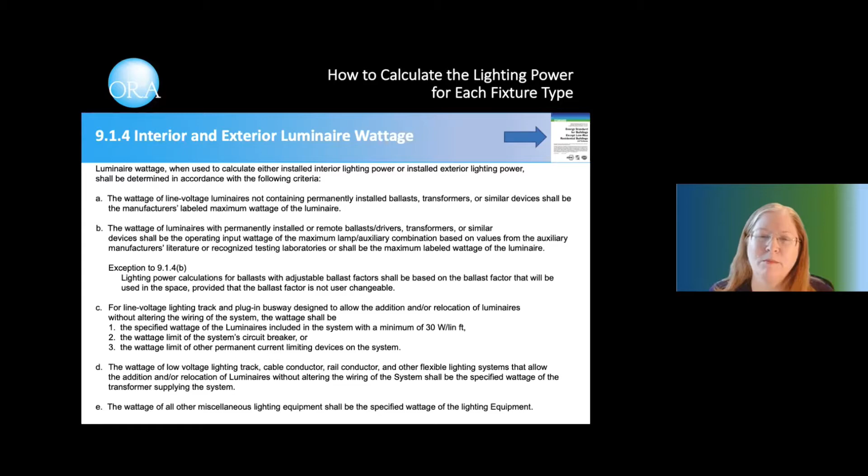Now, why are we going to discuss both codes? For the first time in a long time, the way the watts are counted is not the same. Total connected lighting power is determined by adding up all the watts used on the project. Each type of light fixture has a defined method for counting the watts. This is the code language in ASHRAE. The pages of this presentation are color-coded, blue for ASHRAE and green for IECC, with a code book icon on the page to remind you which code is being discussed.

IECC has written these code requirements as a formula. Dense code language like this makes everyone's eyes glaze over. Let's break it down by the categories and compare ASHRAE to the IECC requirements.

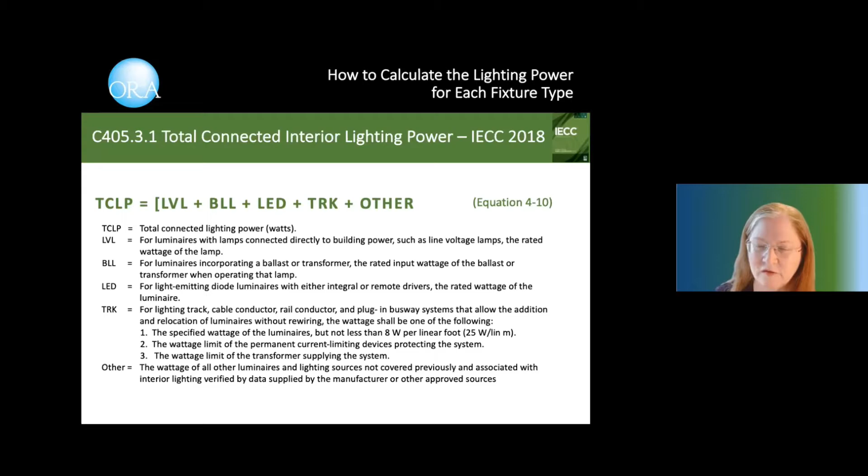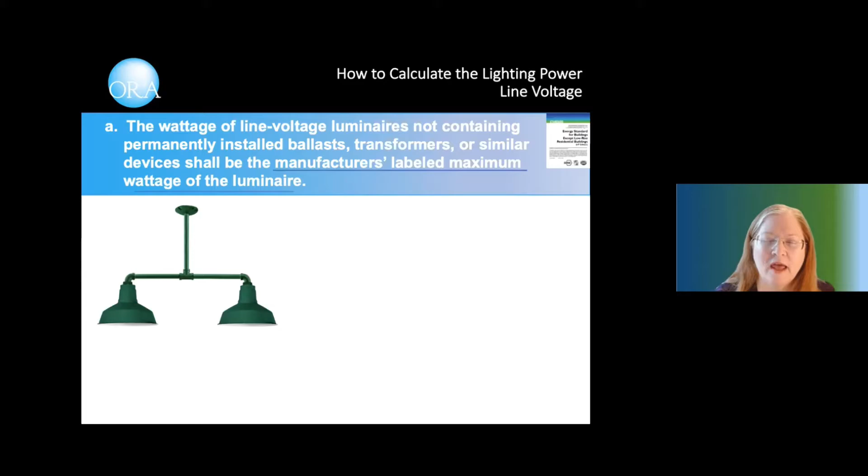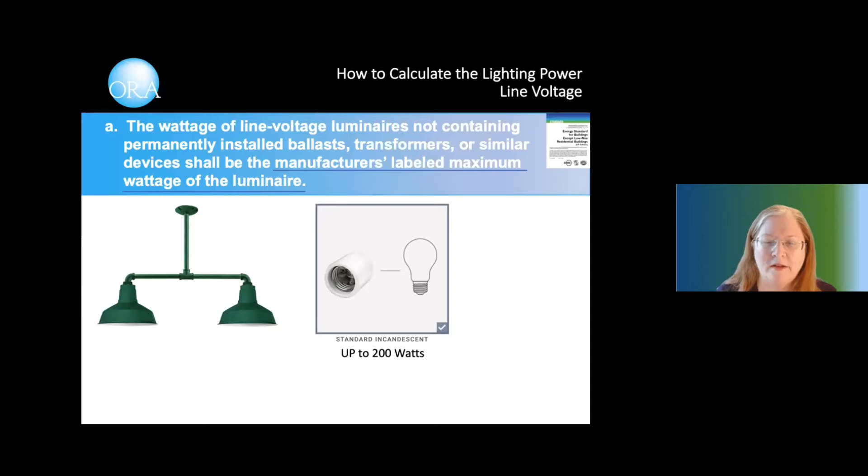In ASHRAE, a line voltage fixture without a ballast, no transformer, no driver, like this one with 2 medium base sockets, is counted as the manufacturer's maximum labeled wattage. This manufacturer says each socket is safe to use with up to 200 watts. The luminaire would count as 400 watts.

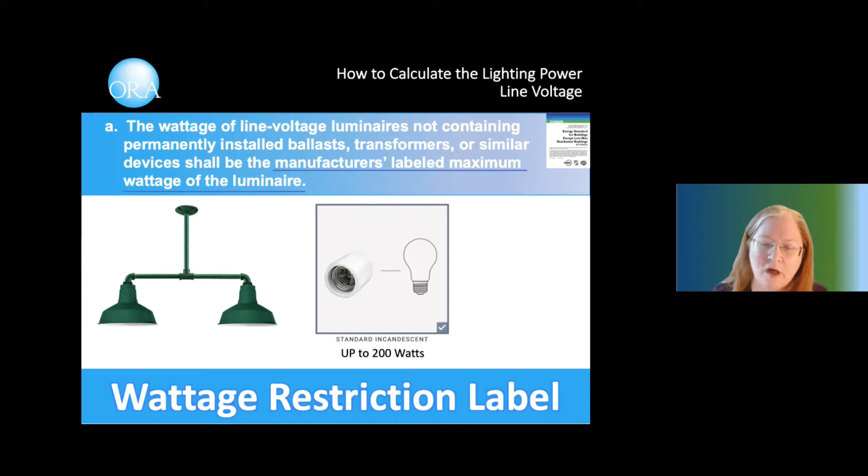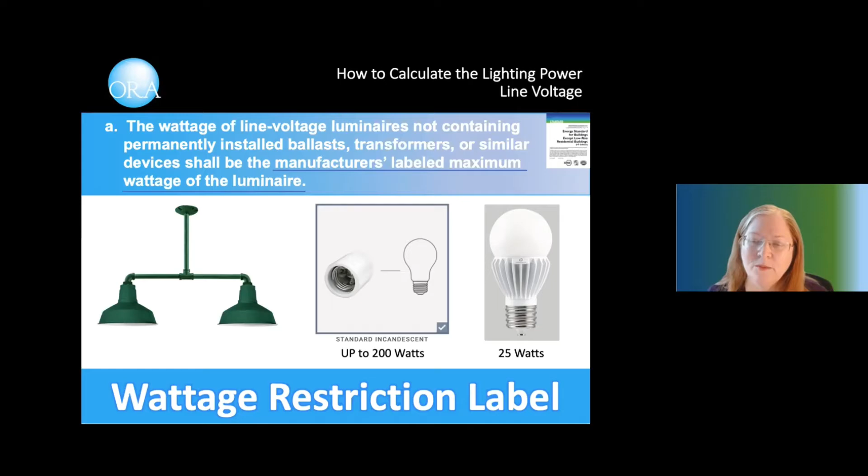The specifier can ask the manufacturer to provide a wattage restriction label on the socket so that the maximum wattage counted is lower. This LED lamp is roughly equivalent to a 200-watt incandescent and uses only 25 watts. With a wattage restriction label on each socket, the luminaire now counts as 50 watts, not 400 watts.

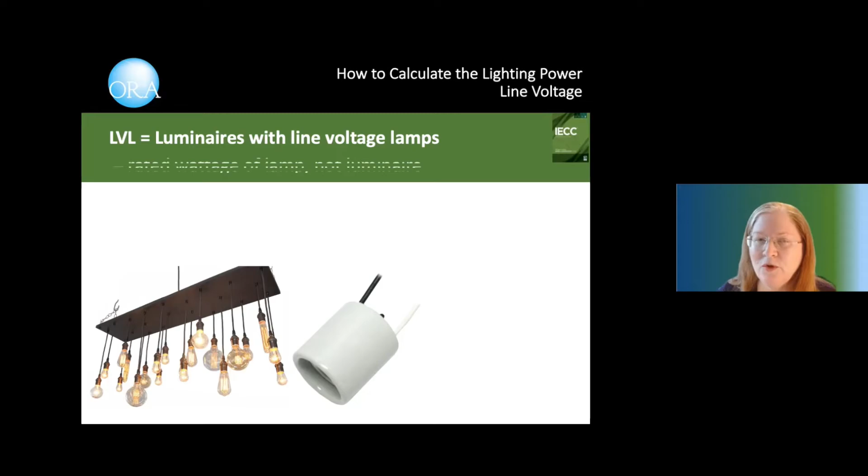In IECC, the equivalent portion of the formula is the requirement for LVL, luminaires with line voltage lamps. New in IECC, we count the rated wattage of the lamp, not the luminaire, which, as we've already seen, can be a huge difference.

In this example, each socket is rated at 150 watts. With 20 sockets, the fixture would count as 3,000 watts. With 20 LED lamps, each at 10 watts, this chandelier would count as 200 watts with or without a wattage restriction label. In IECC, we count the watts of the lamps.

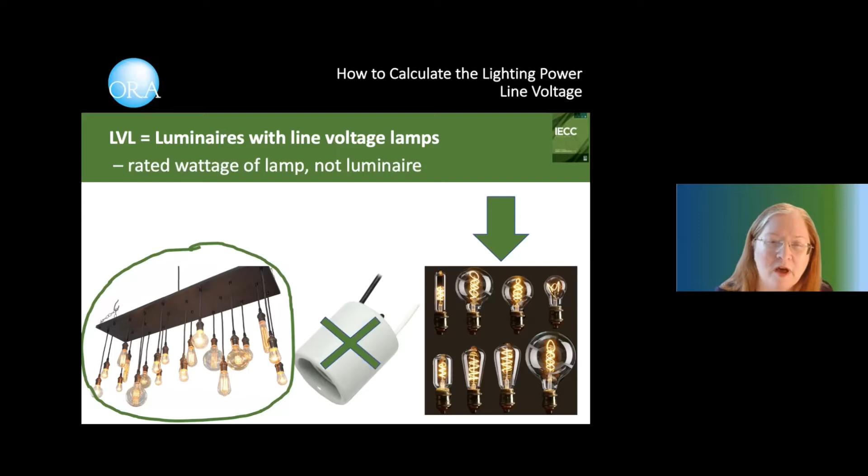When the fixture has a dedicated ballast, driver, or transformer, ASHRAE says count the wattage of that device, or the maximum wattage labeled by the manufacturer. In ASHRAE, this covers both LED and legacy sources.

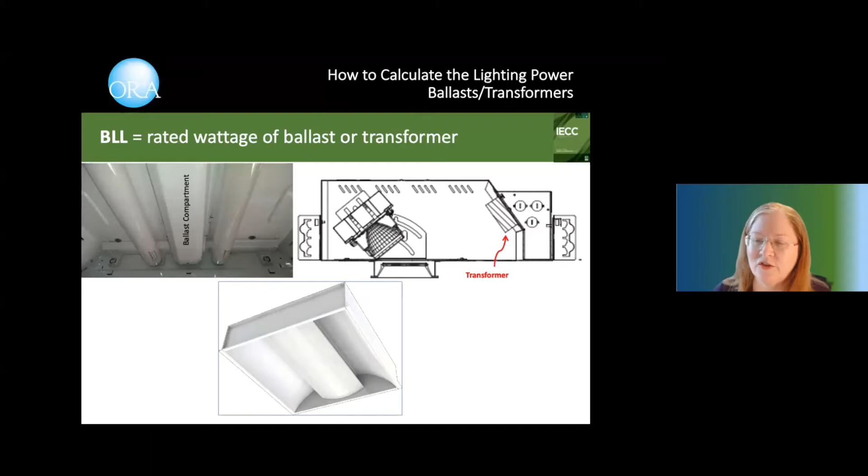In IECC, BLL is the portion of the equation where we count the rated wattage of the dedicated ballast or transformer for legacy sources. For dedicated LED fixtures with either integral or remote drivers, IECC says count the rated wattage of the luminaire.

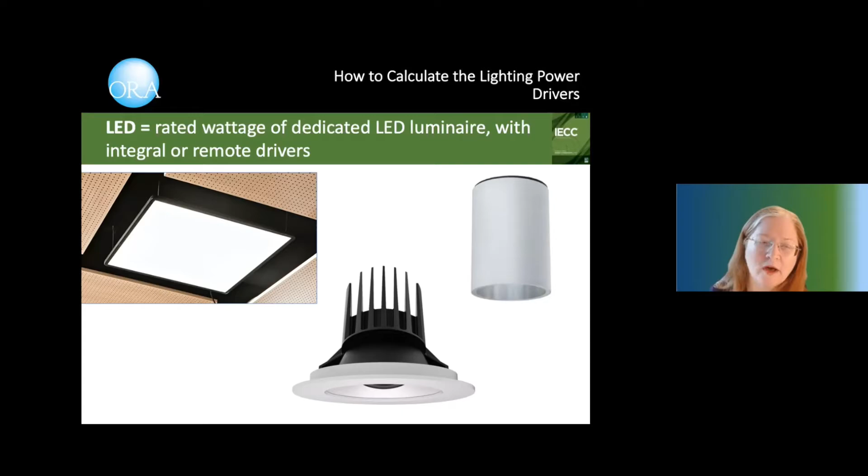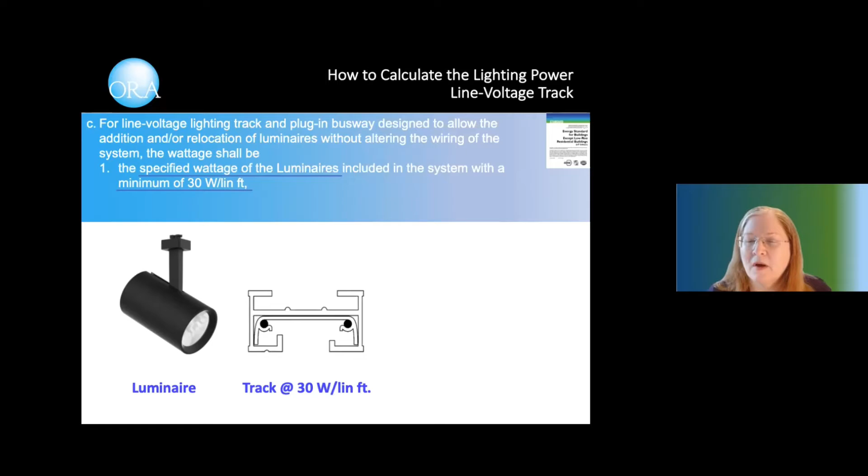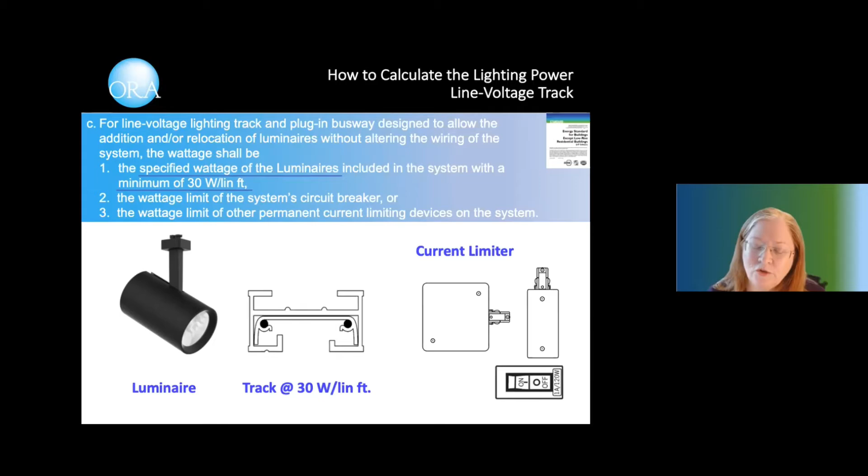When counting the watts for track, ASHRAE separates line voltage from low voltage. For line voltage track, count the wattage of the luminaires used, or 30 watts per linear foot of track minimum, whichever is greater. Alternatively, count the watts of a circuit breaker or a current limiter. A current limiter scares some people, but it's really a simple accessory included in a track installation that restricts the wattage that can be installed on the track, protecting the system from overload, usually by turning it off.

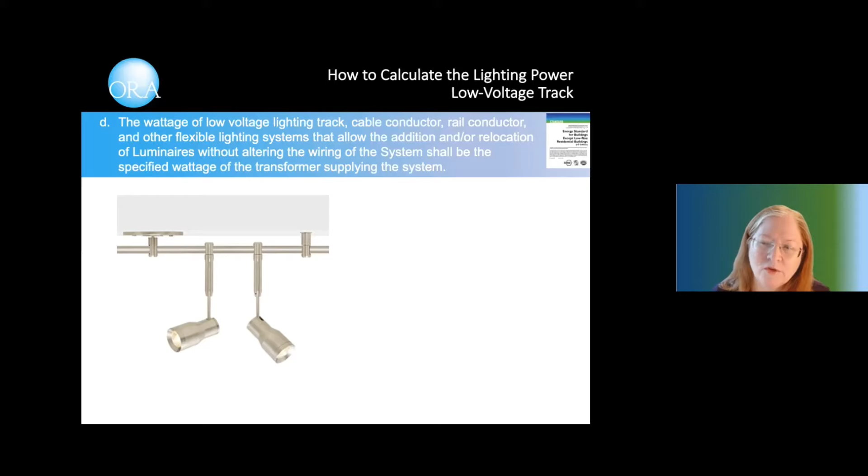ASHRAE specifies how to count the watts on a low voltage system separately from line voltage. Always count the wattage of the transformer supplying the system.

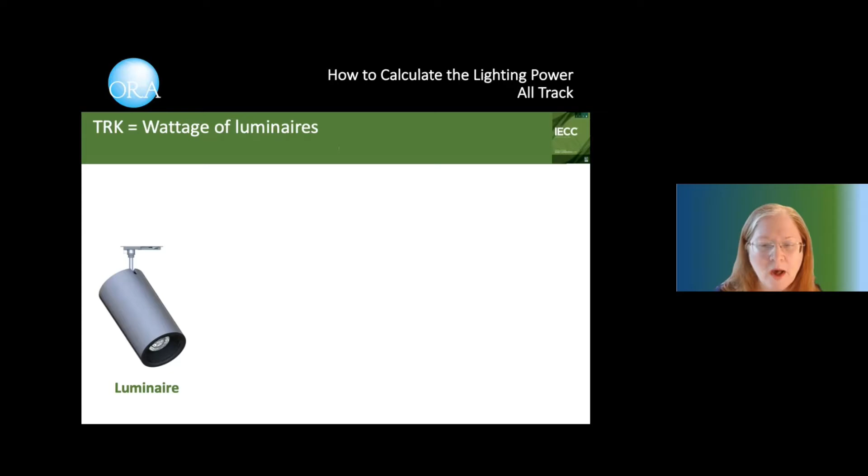Track is another area where the IECC method of counting the watts has diverged from ASHRAE in the current code cycle. For track, similar to ASHRAE, you can count the wattage of the luminaires specified for the track, but not less than 8 watts per linear foot of track. Remember, ASHRAE counts 30 watts per linear foot.

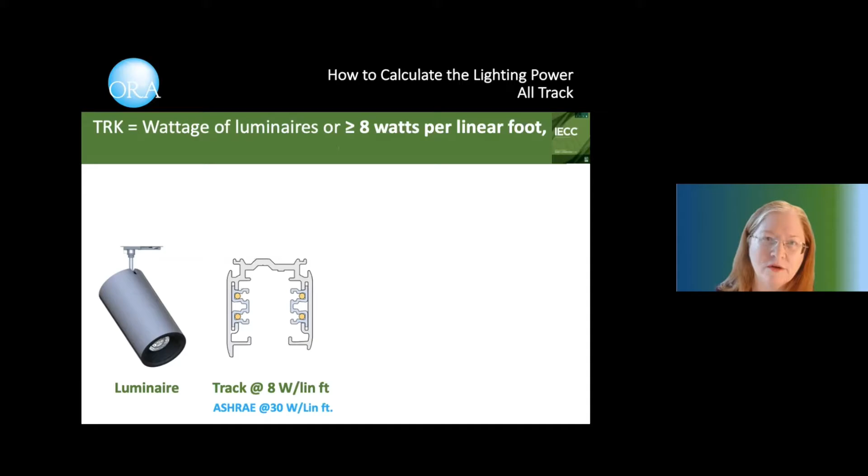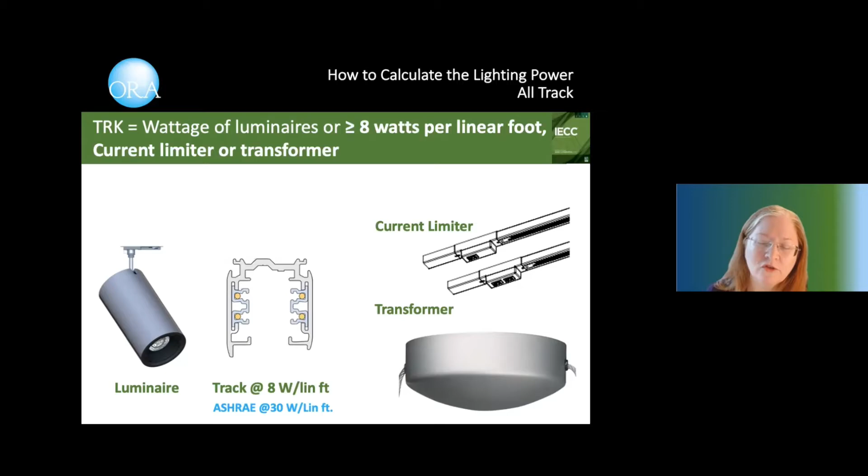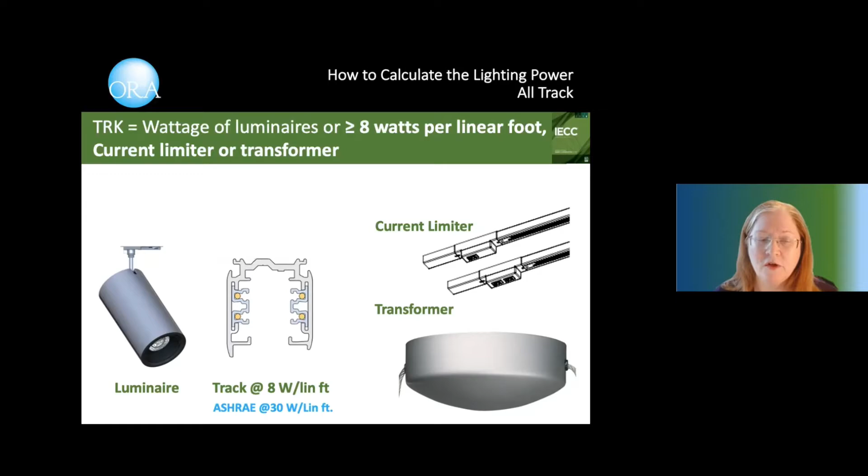A current limiting device restricting how many watts the track can accommodate might still be desirable for long runs of track, but is less likely to be necessary to meet the IECC code path. For low voltage track systems, you can count the wattage of the transformer serving the system, but best practice would mean that the watts of the luminaires would always be less than the capacity of the transformer. And in IECC, you can still count the watts of the luminaires as your path.

If the project has other luminaires not already described, both codes have an other category where we are directed to use the manufacturer's specified wattage.

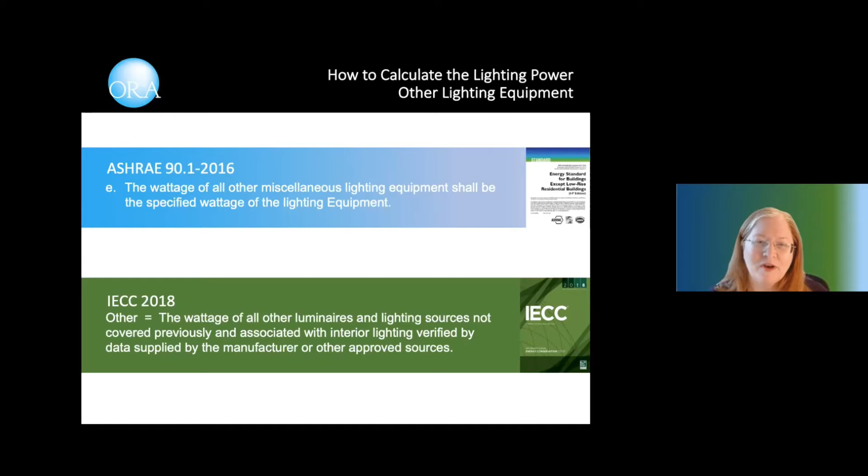In summary, when counting the watts, there are two good reasons to select the IECC compliance path. First, for line voltage fixtures, we count the watts of the specified lamp so that we might not need a wattage restriction label. And second, the track is counted as 8 watts per foot, which might preclude the use of a current limiter.

However, there are two types of projects that must use the ASHRAE compliance path. Projects seeking LEED certification use ASHRAE. And in New York City, if a project is large enough to build a whole building energy model, you must use the ASHRAE compliance path. I hope you now have a better understanding of how to count the watts.

James, back to you. Well, definitely a better understanding, and I think it seems to be a moving target with the energy codes, of course, and having coordination within the team about which codes you're designing to is key to the success of it as well.

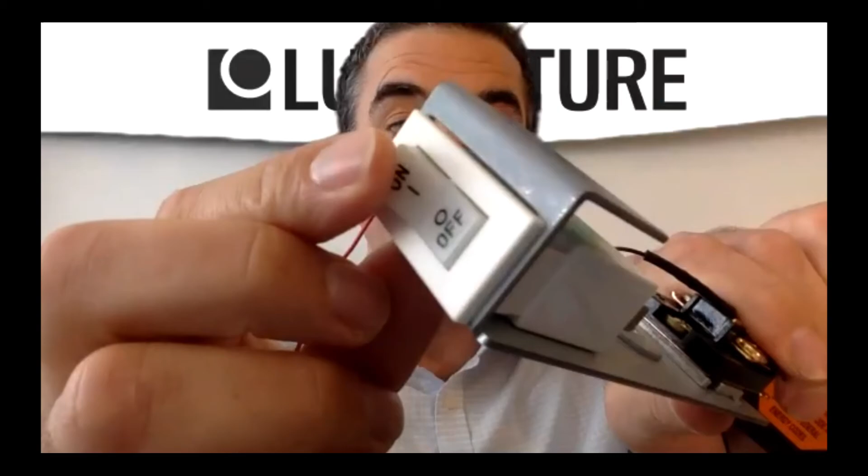And then what we're doing is feeding it instead of a normal feed, you would actually attach that. This right here is the actual breaker itself. The current limiter and the actual breaker is what's going to be rated for how much actual power is going through there.

That rating is usually designated by the electrical engineer, correct? Correct, exactly. That's a very important part of this, to say okay, what's the actual ownership of who indicates and basically specifies what that is.

So what we're assuring by putting a breaker on there, and the range can be from only a half an amp all the way up to 12 amps, is that it's getting very close to what's actually being used on the track. For example, at 25 track fixtures at 18 watts apiece, and a 450 to 600 watt current limiter could be used. With that, it's getting much closer. Regarding IECC, it's a per-fixture label, so it would get even more accurate, being that if it's an 18 watt fixture, the actual label of the fixture shows 18 watts. That's the entire allowance of what that is.

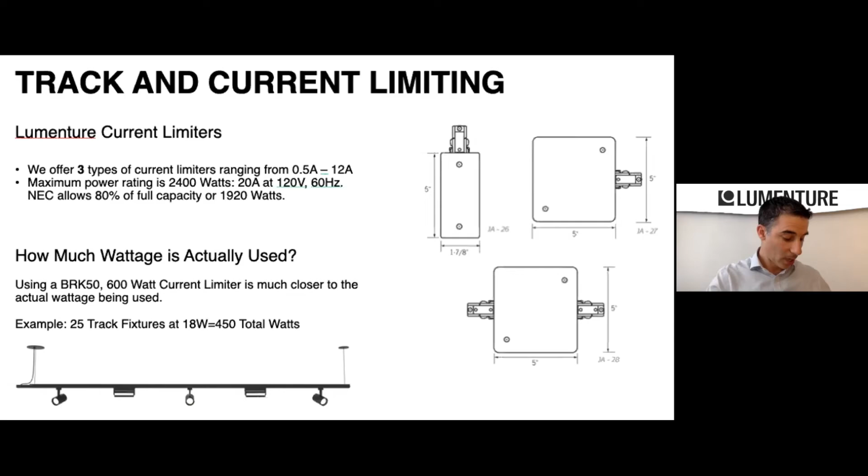So it's interesting, and in terms of the different types of current limiters, there's inline, end feeds, and then a slim end feed. With that, I'll jump over, if there's no questions, to what's a little bit interesting regarding what we're doing for wall washing.

One of the examples we have, in its most compact form, what we do is aim to have the most minimal packaging, so 100% efficient. We've all got those Amazon boxes that has a spoon in a 2-foot box with a tremendous amount of wasted space. So we try to be as efficient as possible, which allows us to inventory more and have a quicker delivery.

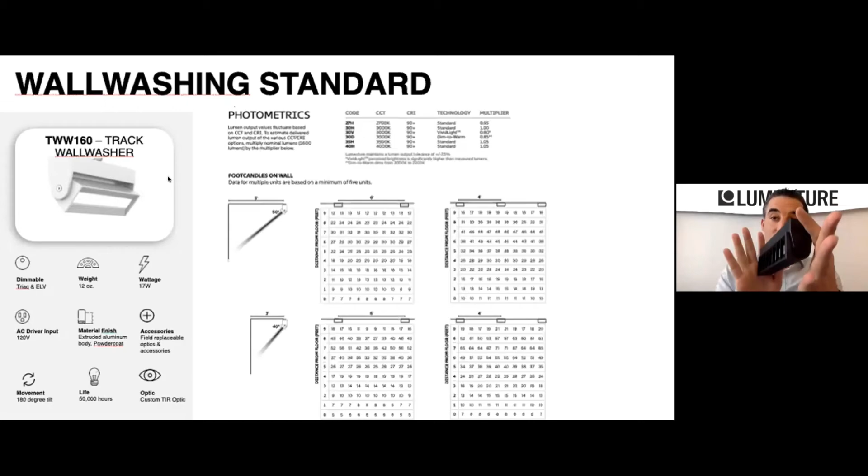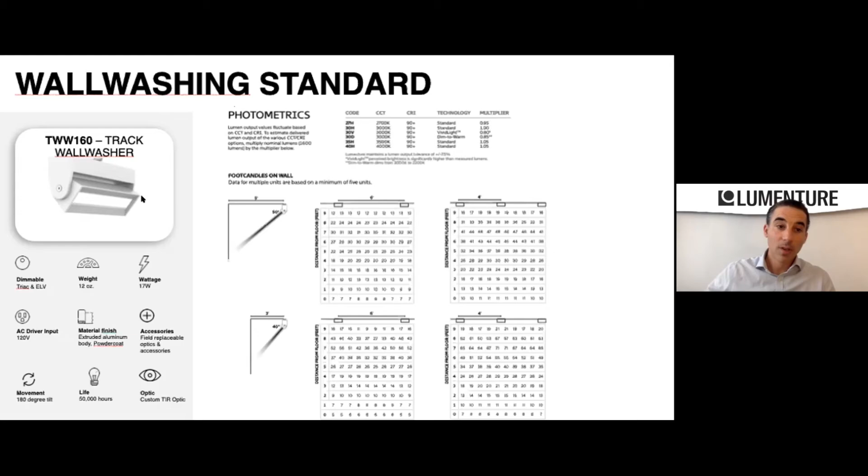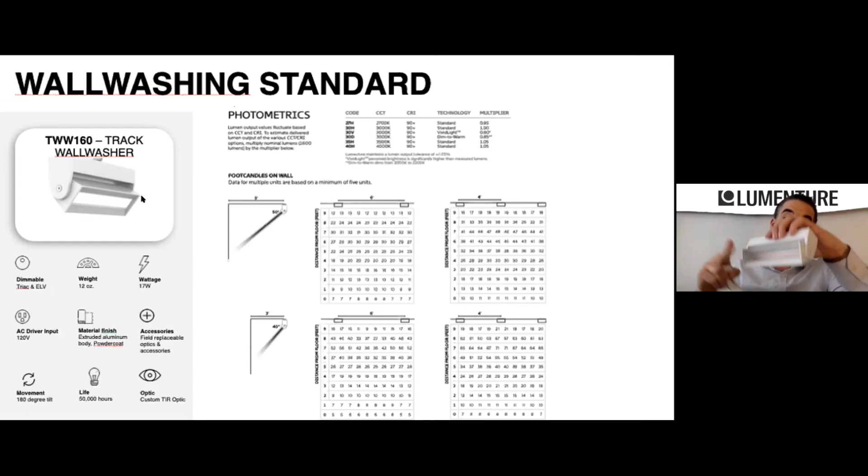There's been a tremendous amount of installs very simply regarding a standard point source fixture and a wall wash fixture. What's interesting is we're doing one layer of light with the wall washer, and then with the point source we're able to accent at a higher lumen level. So whatever these foot candles are, if we add accent point source track fixtures to that, we're now going to raise the foot candle level in a very specific area.

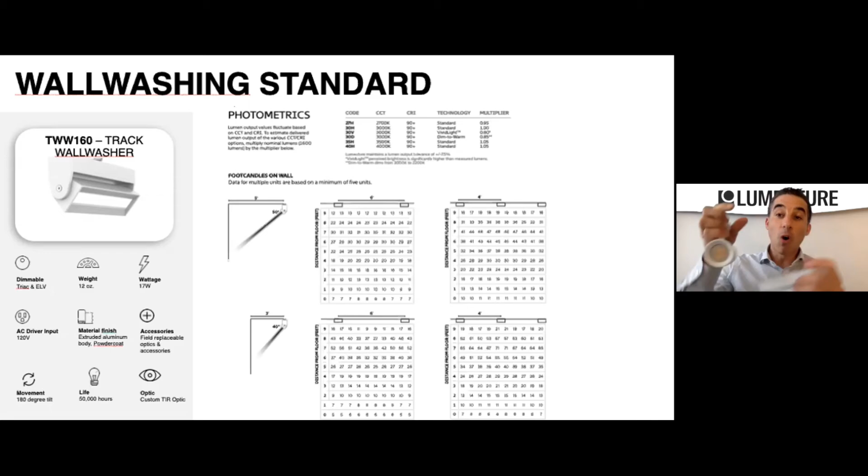Moving on, some unique design installs require actually only a cylinder-esque form factor fixture. So what they've said is, okay, we understand the wall washers, we really appreciate what that's doing, however for this install on this design aesthetic, we only want cylinder-esque fixtures. So what would then happen to the wall washing?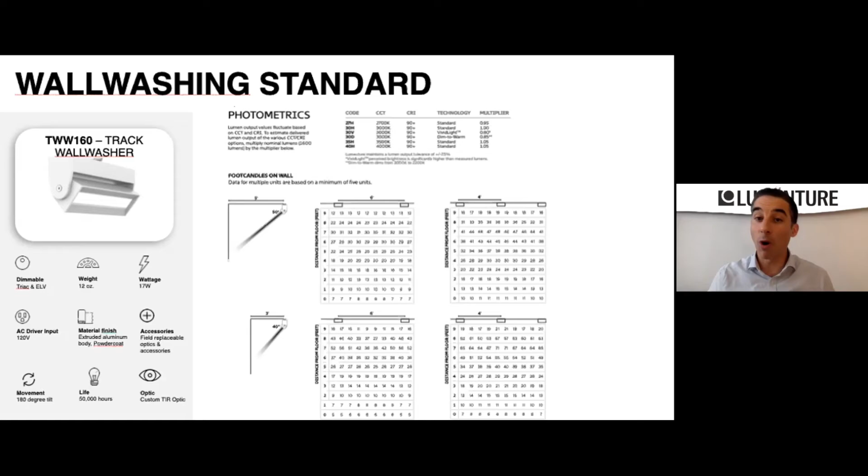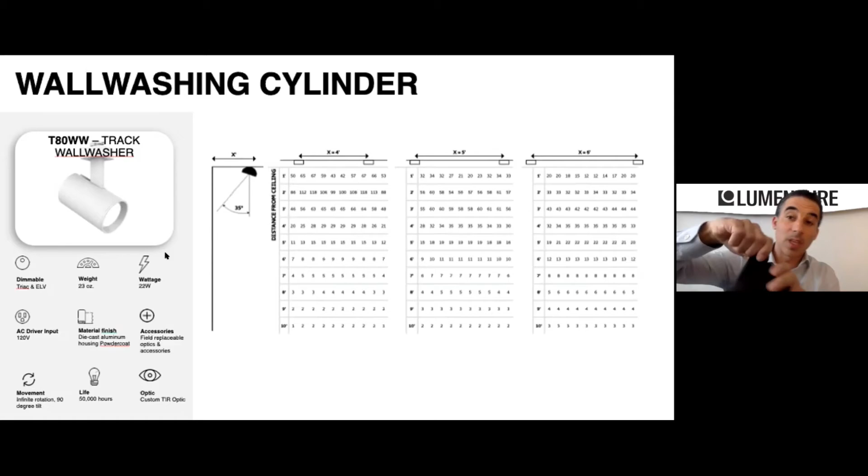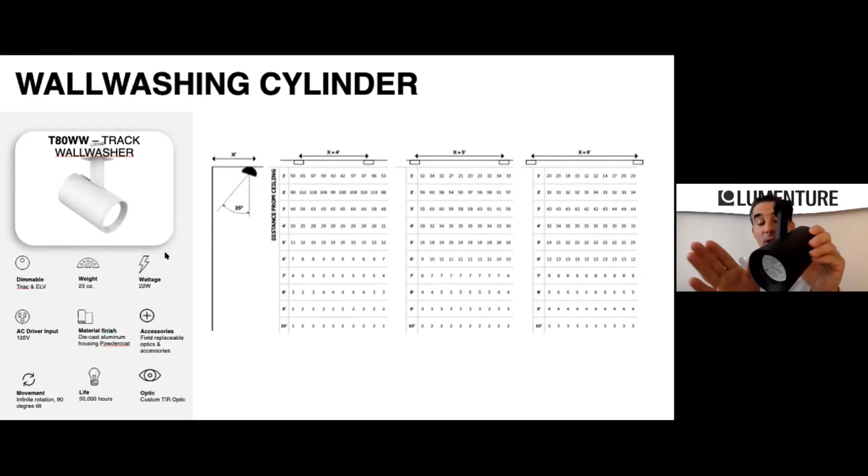What we've developed, and will be coming out with, is a TWW or T80 wall washer that is going to essentially have a point source and wall washing capability. With that, an example is from the optic itself, what we're doing is changing the distribution of what would normally be a standard point source beam, but we're now spreading it out to create an actual wall wash effect through the beam bending, changing that distribution from narrow to wide.

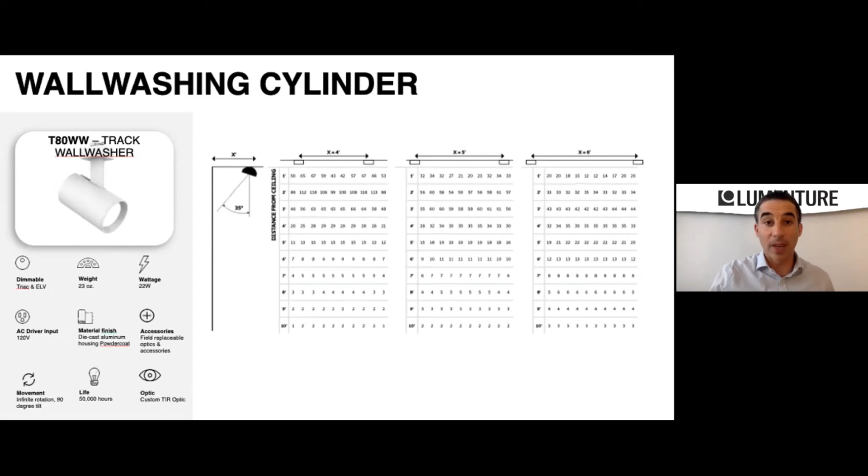It's interesting in terms of the whole spectrum of what's available for wall washing and point source. We're trying to have the most compact, minimal form factor, so no protruding edges on the fixture itself, yet the versatility of a track head with a center pivot point, with the fixture not having the exit out of the back. It'll be a completely uniform install on the track itself, regardless of aiming angle.

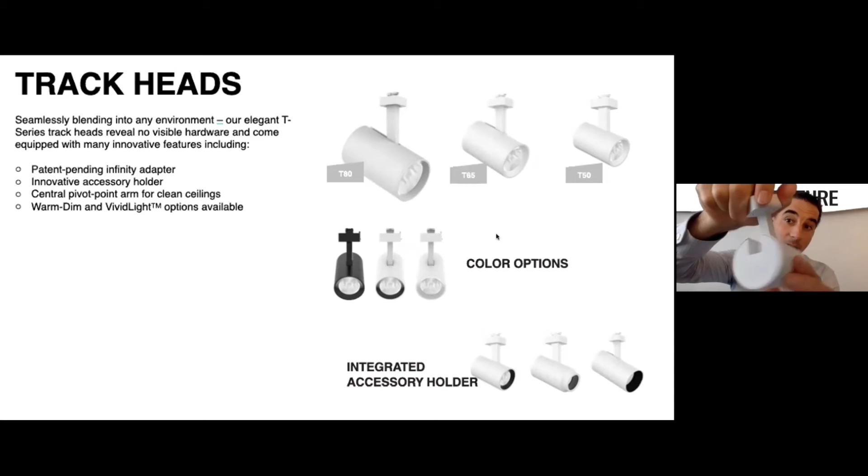It's also interesting because of the half-size track adapter, which can accommodate J-type track, H-type track, L-type track, and global track, a 2-circuit, 2-neutral system. It's a line voltage 120 volt fixture with infinite rotation and no exposed hardware. For projects that require aiming and focusing, it's obstruction free to assure the light is exactly where it needs to be.

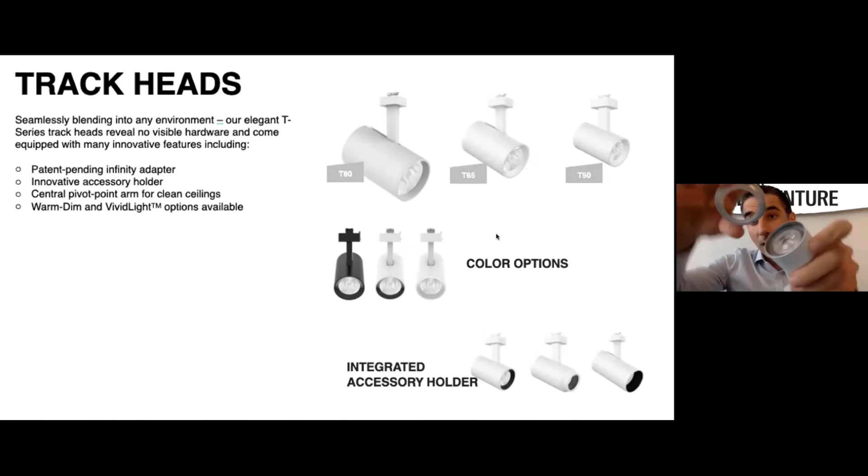We're also paying attention to shielding and very specific characteristics of lighting design by allowing for full accessories. It's a threaded front, so we're able to go for a tapered snoot or a straight snoot. A lot of questions come up about whether the inner is masked, so it would be glare free or flash free on the edge of the lip. We try to have the fixture aperture be as quiet as possible.

Also worth mentioning is that with each accessory and fixture, you have at least one accommodation of a thick accessory, and then at least two of the thin film diffusion accessories, so a linear spread or some sort of color gel is available.

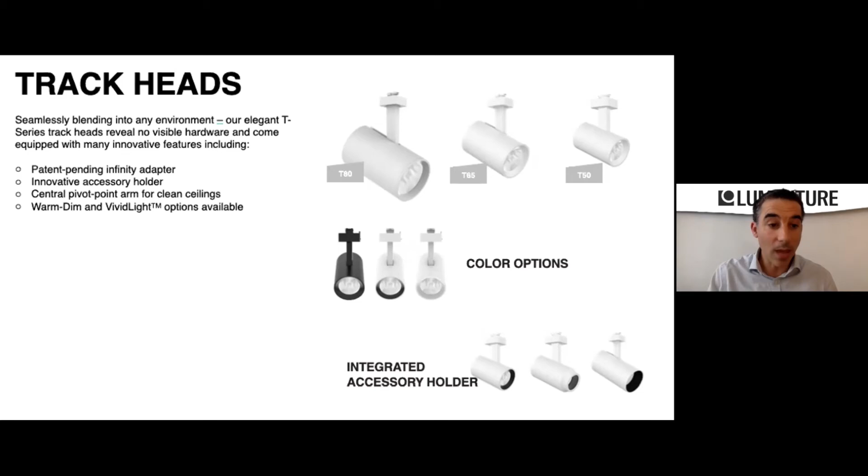We understand deadlines, so we make sure our website is a 2-click website to get you exactly what you need for the spec sheet. You'll notice on the first page of every spec sheet it's the complete catalog number. We do this by design to give you the full breadth of what characteristics are available without needing to go to subsequent pages.

All of the subsequent pages go into the details regarding the actual candela curve, the different color temperature, multiplier levels to see how much light is actually getting out of the fixture, and the last page has all the different accessories, the tapered snoot, and so on.

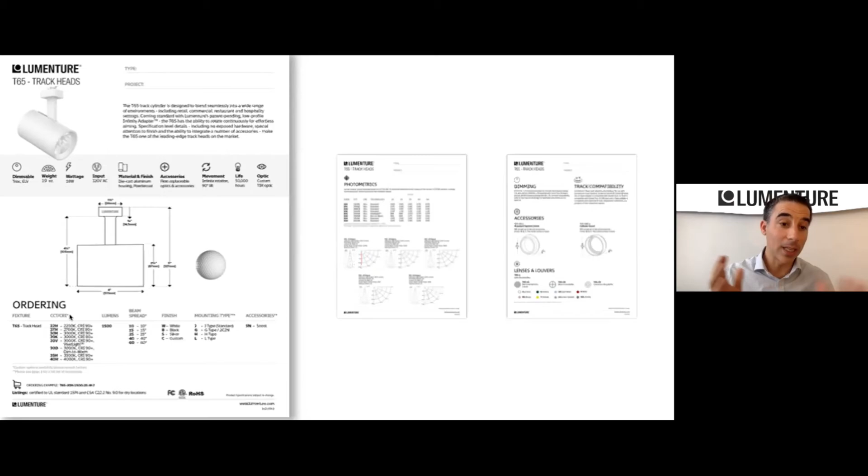So the T65, you'll see, has a beam angle range all the way from 10 to 60, and everything here is also available in dim to warm. We're not limited by available color technology, so you'll see listed on some spec sheets an actual plus 95 CRI chip. We want to pay particular attention to that.

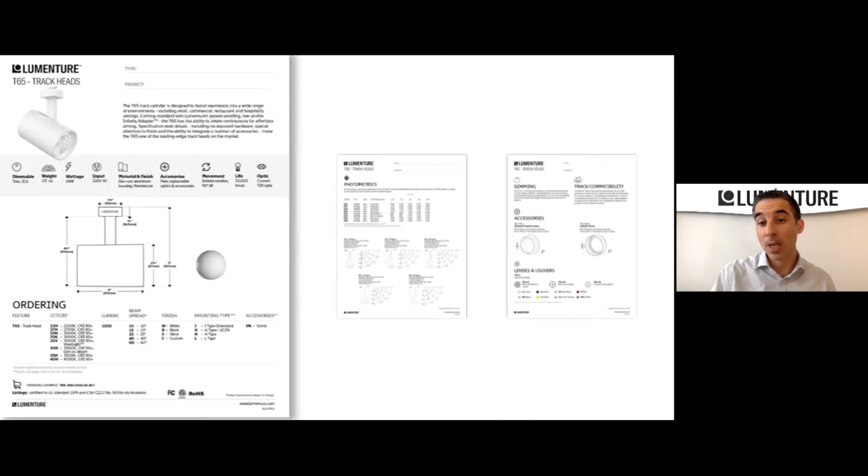With the fixtures, we're also a full breadth of the range into downlights. With the downlight range, we originally had our DL100 series—an example of where we came from. It has a little bit of a thicker flange and a little bit of a wider flange, but you'll see a very nice shield hood there, to assure there's not going to be any refractivity going into the plenum itself, and a nice clean shaved heatsink.

There was a question that popped in, so we can address it. On the dynamic white side, it's 1800 to 3000. In terms of our warm dimming technology, it goes up to 3000. We're trying to go for that, and depending on the scope of the project, we can also look at other LEDs that are out there. If there's a range you don't see, we can go for it.

We purposely, by design, put a static 1800 color on our 2200K on our spec sheets as well. As a standard, our CRI is plus 90. We make sure everything is in inventory—everything you've seen here is fully inventoried in Connecticut. We don't have a formal quick ship program, but we understand the need for small quantities on quick turn projects, and we've been able to accommodate that as much as possible, which is interesting.

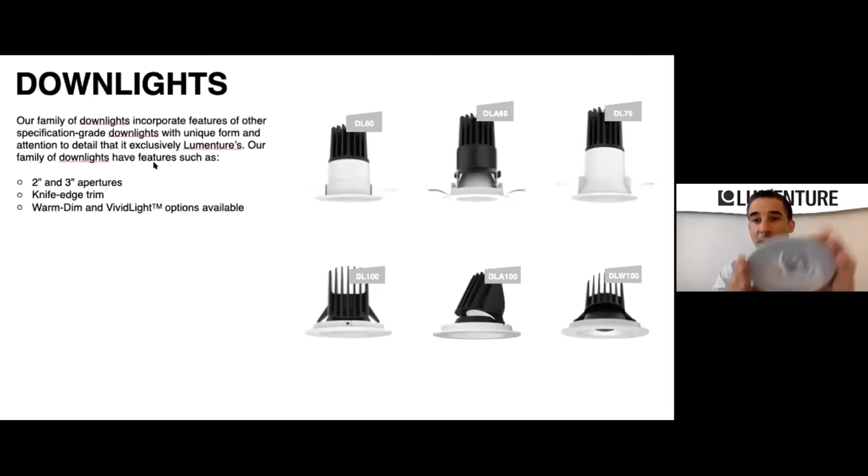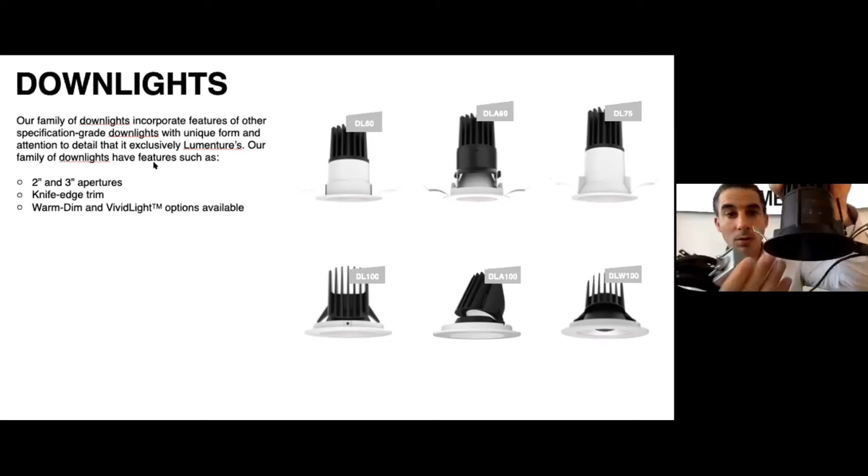To further the actual range on downlights, we've gone from what would have been a wider aperture to now a DL75 series, where we've taken the actual aperture and shrunk it down, with a smaller flange and a nice deep regressed cone. And then we've gone further to a more narrow and smaller aperture series, which is our DL60.

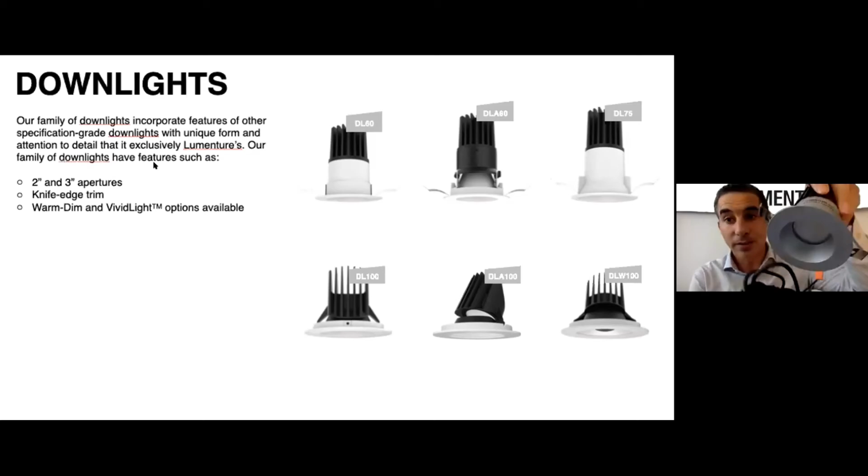And here's an example of the DL60. You'll see a nice deep regressed cone, a very thin flange, much smaller in terms of its impact on the ceiling, but full shielding available with a nice deep regressed cone, so glare free.

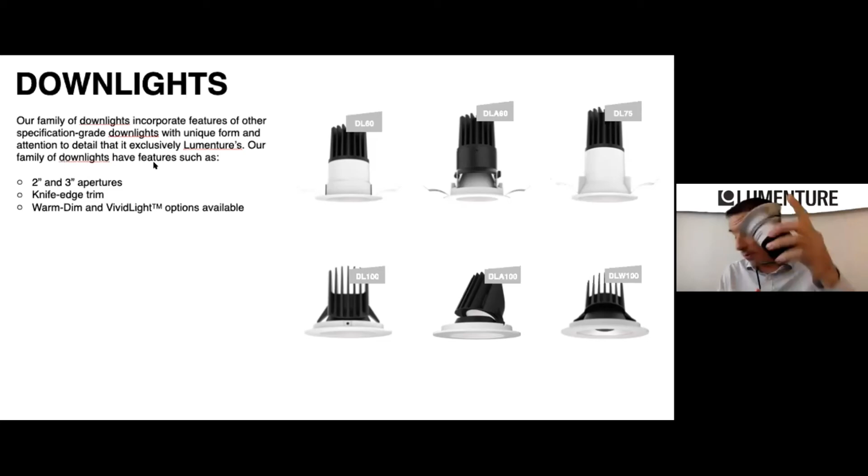And then it's a full range of a family. So we have the static or the standard fixed, and then we also have the adjustable. With that, you'll also see on the adjustable the glare shield as well, to assure no flashing regarding inside of the fixture itself or in the actual housing itself.

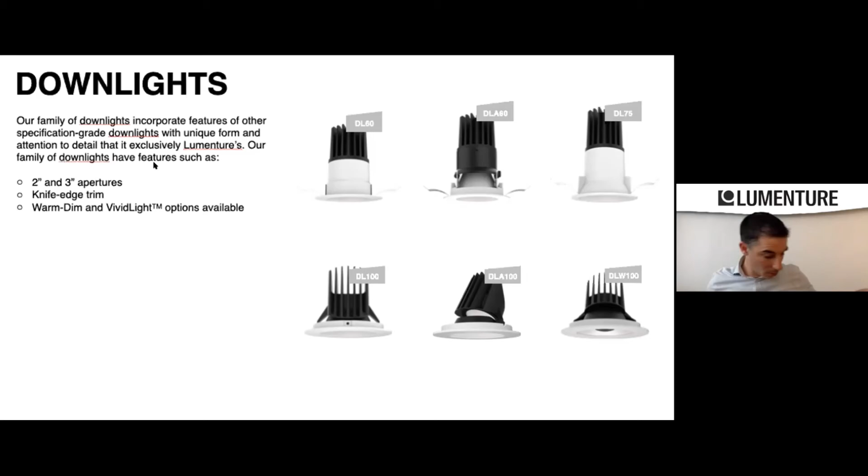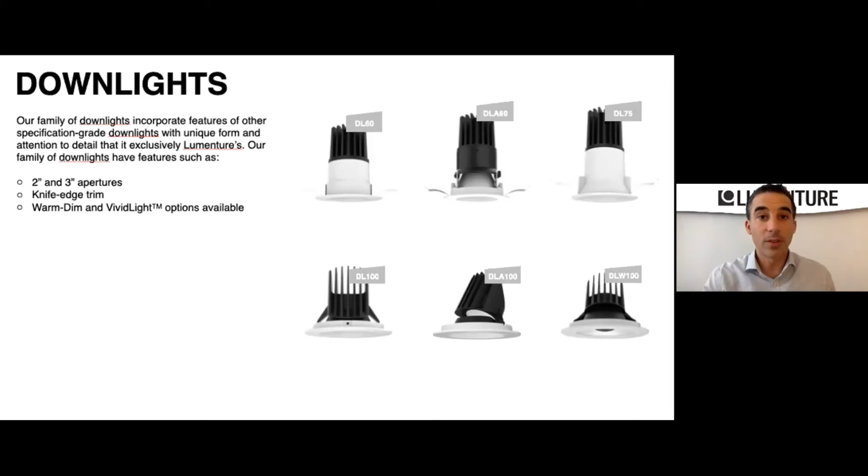And then to that point, we also have squares. You'll see the squares, and then also, most interestingly, the flangeless. So we have a very rigid and secure spine flangeless. It's not a piece of plastic that would have potential waves in it. So it's something that's going to sit very sturdy on the surface of the drywall to make sure that the rigidity over time is going to be maintained.

And with that, on our spec sheets, it calls out all of the same characteristics that you would expect, specifically regarding the overall depth—it's the most minimal as possible in the ceiling. Dimming protocols, we are standard ELV and TRIAC. On our website, you'll be able to navigate to the downloads page and see a full dimming compatibility matrix chart, which actually calls out Leviton and Lutron dimmers and catalog numbers, both pre-programmed from the factory and then adjusting a low-end trim in the field.

So what we're trying to do is really pay attention to some of the easily overlooked details, to assure an engineer that dimming compatibility would be within expectations of the spec.

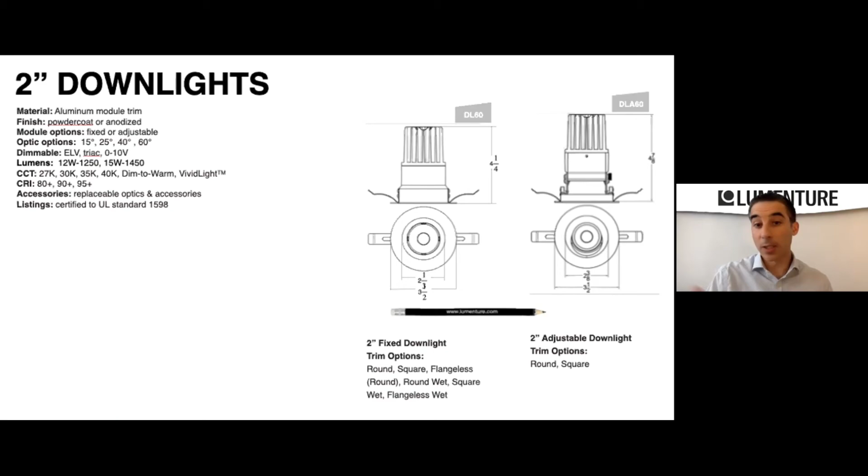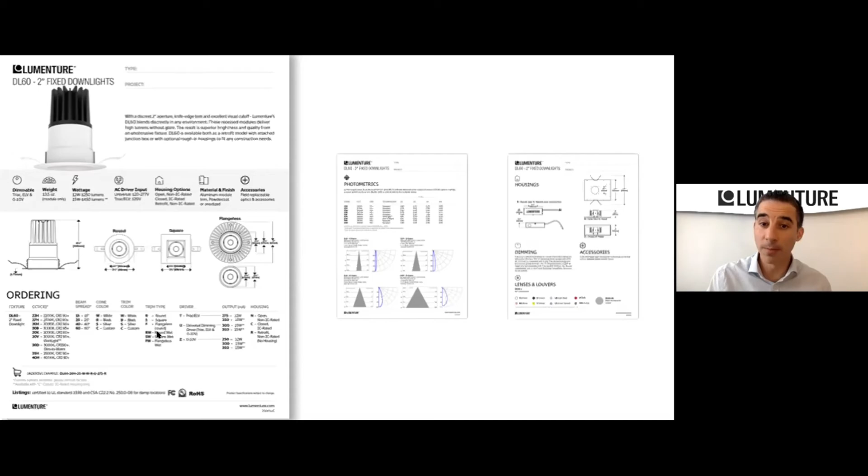So with that, every spec sheet of our new DL60 and DL75 and current DL100 fixture series, on the first page, has all the nomenclature. And as I mentioned before, it's an entire series. So you'll see both flanged, flangeless, square, round, adjustable, and then also wet location, which is interesting. And then of course, on the last page, you'll see the overall dimensions of how it actually can fit into what is typically a very minimal real estate plenum depth.

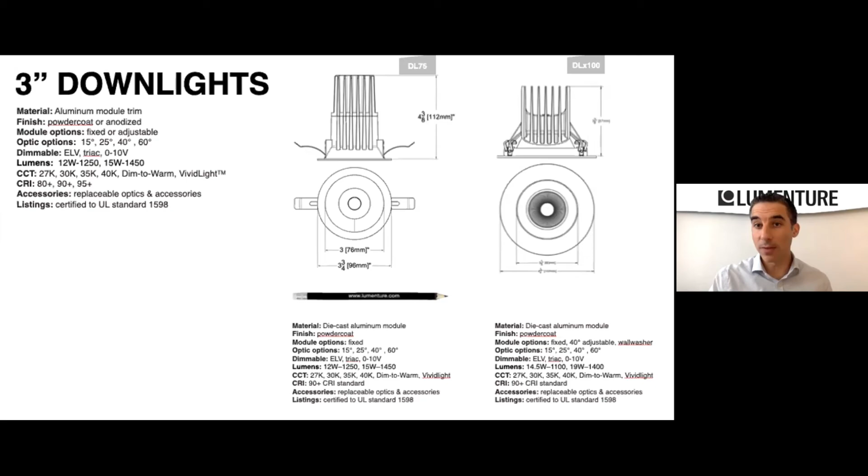Going back to the track, there was a question about getting the UGR information. If you're doing a well job, is it available to get candela per meter squared, et cetera? It is. So all of that, just approach us here at the factory. Please approach all the Oblaney Rinker team as well. And whatever is not published on the website, we'll be able to make sure that either from the Oblaney Rinker team and I, with our support, get you whatever information for all of those interesting characteristics that come up, related to WELL and all of that.

Further to the track, the question was, does the wall wash have a cutoff snoot on it? It's a great question—it does. However, it's still being cooked in the kitchen. So what we're trying to do is assure that that half snoot that would go onto that wall washer does not restrict any of that actual beam angle for side to side. The challenge is anytime we put on an accessory, that's going to have an impact on the overall angle or actual true spread of what's happening with that beam angle. We found with our half snoot first prototype in our rapid prototype program that it restricted the light too much, so it's still in development.

However, there are renderings that are available, and there is an actual catalog number for any projects that need to be spec'd out right now. The intent is that it'll just be a little bit more of a shallow half snoot, almost like a quarter snoot. What we're doing is assuring that any of the guests in the space, or the gallery or the museum, on the side of the fixture that is not going to get any glare—that scoop is really going to achieve that glare-free install, but still make sure it has a broad brush of the light on the vertical surface.

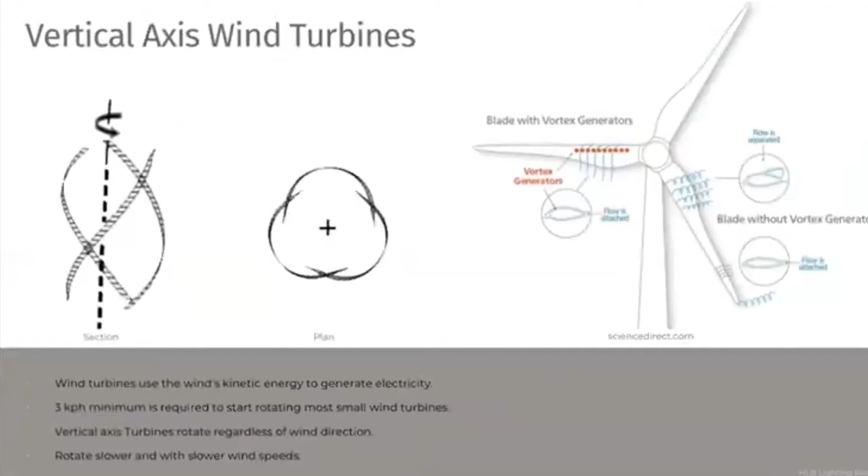So welcome everybody. Our theme is energy and sustainability. We welcome you to our office, which is 3 kph, because that's the minimum wind speed that we need in order to generate energy. Our area of focus was the wind turbines, and more specifically, the vertical axis wind turbines. We are using the wind turbine concept in order to convert the kinetic energy and the person's airflow and movement into the space to generate power.

It was like that closed loop system where we just generate energy for ourselves, wind being that kind of source of energy versus any other source. We would also want to have in our lobby design the ceiling parts continue as a furniture piece and create a closed loop, so everything is all together organic and creates a new experience for the occupant.

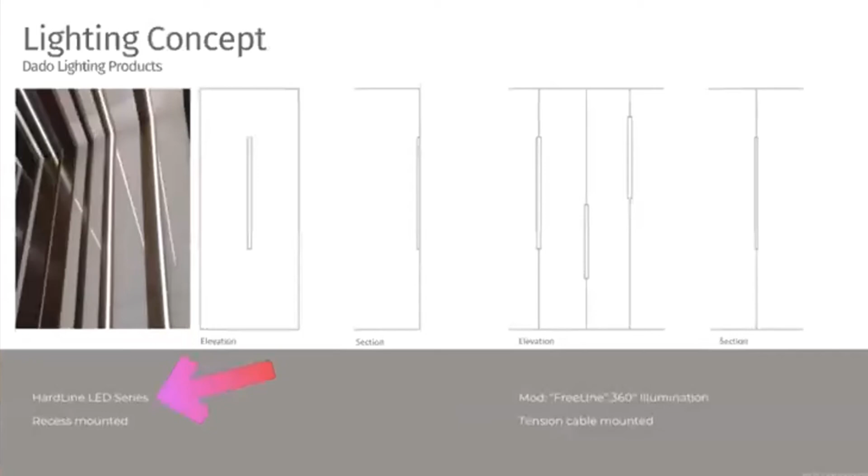The HardLine LED series from Dado Lighting - what we elaborated is a FreeLine series, which is a freestanding illumination piece. Because their profiles are so slim, it made it easy to make it part of the space. Like Eliana said, it became the partition and how you're guided through the space, and it's not clunky and in the way, it just nicely fits into that.